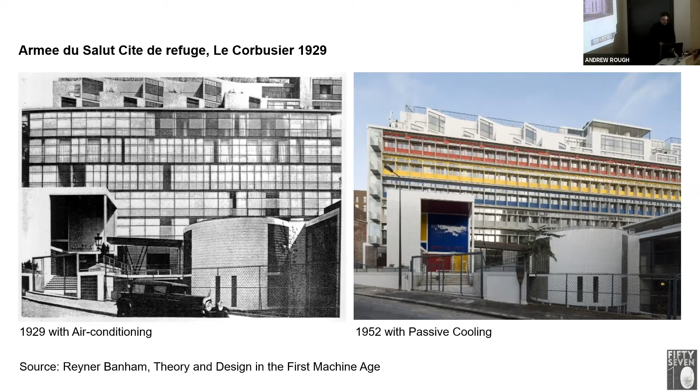So for me, this is the salutary lesson. Unfortunately, this is what we're doing again. This is what we need to do now, and that lesson was learned by Corbusier at the end of his career. We'd all forgotten about it until I read it in this book, and a lot of people obviously use this example quite a lot. But it's a lesson of our time. Have we learned anything? I would say no.

This is London, obviously the Shard. It is a lovely building, a really beautiful thing. I get crystalline towers and these sorts of things from early days. It is beautiful, but it doesn't really work, it doesn't solve the problem. It does it better, again, it's got a triple facade, it's all very complex, high performance glazing, and really fantastic, efficient air conditioning systems, but it's sealed, and you can only go so far.

The architects and engineers have done a lot of work looking at the embodied carbon of this, and it's better than you think, but it's nowhere near where we need to be.

So the net result of this, really over the last probably 50 years, is this: in 2018 we emitted 37 billion tons of CO2, and 40% of that is from what we do as architects, which is kind of quite shocking, really.

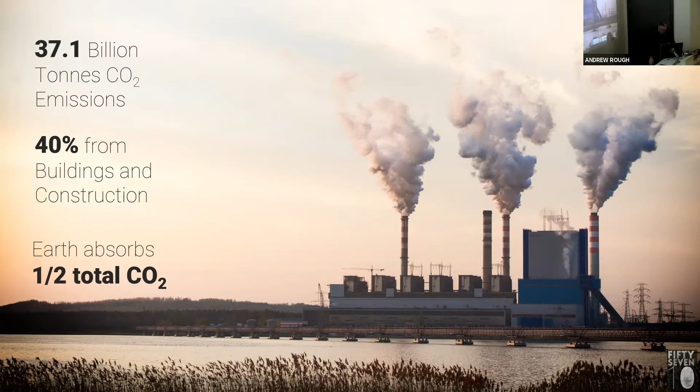And the Earth, at its best, can only absorb half that — though I even think that's debatable. And as we know, it's all been a COP. At the same time, we're cutting down our lungs. We've lost 1 trillion trees over the Industrial Revolution, hence the new push to replant 1 trillion trees just to balance where we were. This is a really sad example, the Amazon.

And the consequence of that, we all know, is that 1-in-100-year events, or even 1-in-1,000-year events, are happening every few years now. And this is all being predicted by the climate models as well, so everything we see now has been predicted. I was working on some of this modeling 10 years ago, it's been around for 20 years, and everything is actually coming true.

Floods, again, 1-in-1,000-year floods are not uncommon now. We've seen that happen this year in Beijing, Australia, Germany as well, and also in New York — that's three really, really statistically rare events happening around the world at the same time.

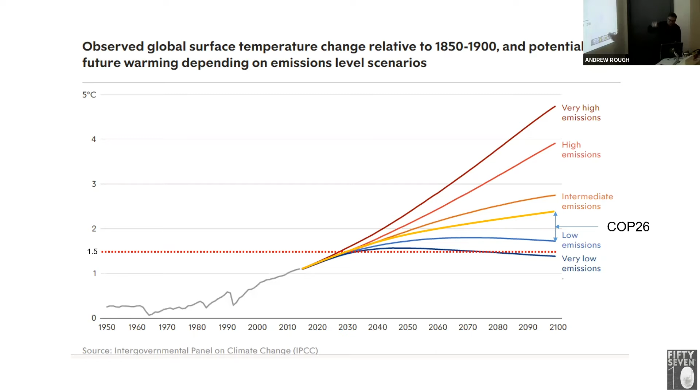Anyway, there's a lot of work to do. How do we get there? Right, so that's the first thing.

So I would say, just in terms of COP, hopefully you were all glued to your screens. I think it's the best that could have been done. I think the agenda was set slightly wrong, so it was always going to be difficult to achieve that outcome based on what was done.

And they missed this entire thing, which we'll come on to in a minute—the work that the construction industry, myself and others around the world, through the lockdown, we've all been having conference calls around the world and got ourselves sorted. So we've got to have a plan for how to get net zero by 2030 for buildings. That's what we're going to talk about later.

But anyway, on to the next thing. So what about me? And how have I come to this point in my career?

First thing is, I'm obviously from Aberdeen. You'll notice this is the Imrie stone circle. And this is where, coming back to this thing architecturally, it's just naturally—you take the context around you, and that helps form who you are. For me, this is it. This is about the local materials, it's from the earth, right? So this is where all my architecture kind of comes from.

The idea of actually dropping someone down and building a lovely spaceship type thing, Buckminster Fuller in the old days—that for me isn't the way my head is wired. So for me it's about this closeness to culture, closeness to the context, closeness to the earth.

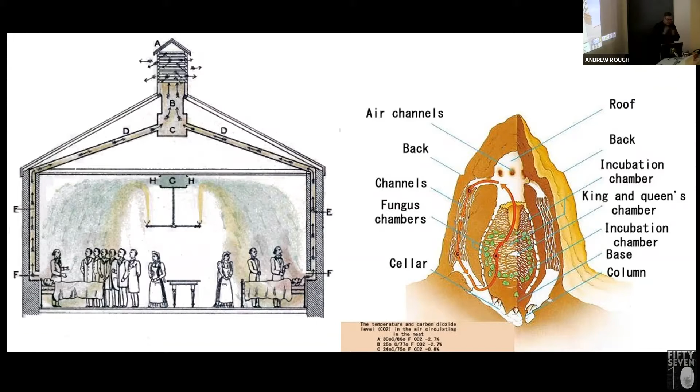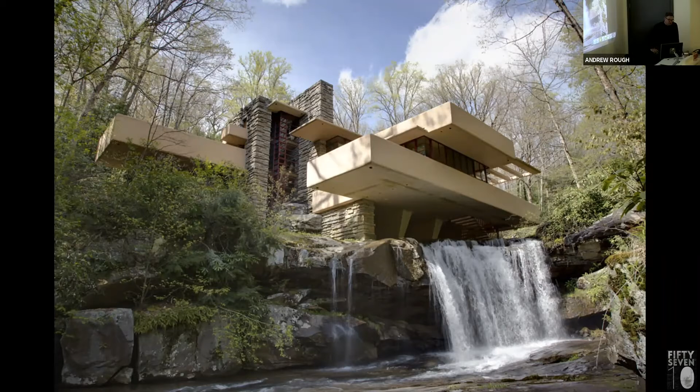And obviously there was no thing, obviously, with the architecture. This is my preference in terms of Falling Water, Frank Lloyd Wright. For me, it's got everything in it I aspire to. So again, that's kind of the education side of it.

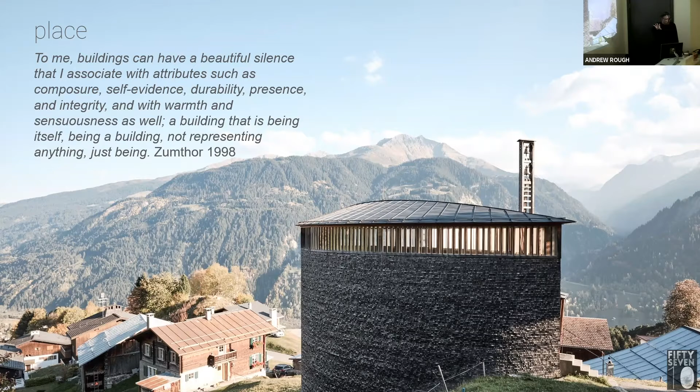So from that was the teaching side of things, really. That was where I was trying to teach here, 20 years ago.

And really from that, when I went off and did some research, and we've been talking about this, it isn't just about design. It's about numbers. And again, coming back to this thing where I do have this kind of side of my brain that is engineering as well as art. So the art and the science, the engineering, comes together.

And so I do love numbers, and I think we've all got to learn numbers. We can't rely, pass the buck over to engineers to then do the numbers for us. We've got to embrace numbers. That's the only way we can achieve this net zero.

You've got to understand, how much does your building weigh? How much does it use in terms of energy, all those things, but you've really got to understand that kind of numbers. So this is my education, my MPhil, and we went into the detail of buildings where you actually asked people. So I went in and surveyed all the people in this building and worked out what was working and what wasn't working.

And there was some real problems in the top floor. People just hated it. They absolutely hated the building to a point where they walked out. Oh my God, this is pretty bad. And this is a passive design building as well, by one of the profs in Cambridge. And then I did some salt modeling, so obviously you can do all this with computers now, CFD analysis. It's absolutely amazing. And at the top slide there is a kind of video as well.

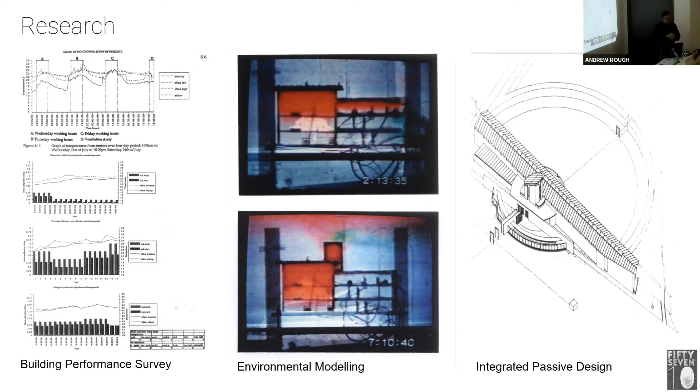This was the thesis project, which was a museum building. The brief was to design a museum building, but you're not allowed any mechanical ventilation or air conditioning—you've got to do it all passively. So everything was done based on humidity, because if you work with humidity, that's how you can preserve things. That was the kind of design there.

Then further research—this is when I was teaching here, so I was also doing some research. You'll notice Shell's headquarters building. Then I wrapped it up a bit, working with Oxford Brookes University, profs there, and we studied 1,000 people in Aberdeen and Cambridge.

I was running a field study in Aberdeen. We surveyed everybody and worked out this thing called adaptive comfort—that's the graph at the top. Everything you've read about comfort from engineers, talking about 21 to 24 degrees as a linear thing, is completely wrong. They've missed the point completely. If there are any engineers that still say that, please send it to me and I'll sort them out.

It actually changes—the comfort temperature inside is based on the outside temperature of yesterday, to complicate things. What we're regularly trying to do, and it takes a lot of argument, is get to 28 degrees centigrade. This is quite a challenge for us from the Northeast, but it's actually quite comfortable if the context is right, if you're prepared for it. It's called adaptive comfort, and we need to get to that.

I need to win that argument in every project with every engineer. If I don't win it, then what happens? I need mechanical ventilation, I need air conditioning, and then I get a sealed building for my engineers. So that's a really important win. When you're out practicing, challenge your engineers, talk about adaptive comfort, and then we'll naturally get to that natural ventilated approach.

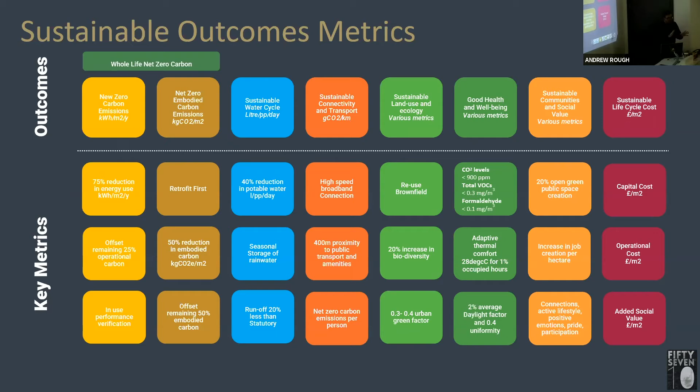I'm not going to go through each one, but really we start off with certain things, and it's reduction, and then it's actually reuse as well. Retrofit first is absolutely important. You can see it's all there, and I'll send this through to you. You should have this hopefully on your desk when you're actually looking at some of your analysis of your buildings and your projects, and then see how close you get.

So just taking each one very quickly - net zero outcomes. There's no shortage of energy. There's 1 kilowatt per square meter hitting us for half the day, every day. It's from the sun. It's how we actually harness it, how do we capture it, how do we store it - that's the issue, and how do we do that. The first thing is retrofit first.

We can't solve the problem by building new buildings, we can't do that. We've got to think about fabric first - regenerative engineering, recycling in terms of really efficient engineering, taking the machines out. When we do it, it's all about this passive house approach to thermal recovery, on-site renewables, and when you can't get enough there, we can't go crazy with eco-bling distorting the architecture of the building. I'm not suggesting that, but we need to maybe have some off-site as well. Then there's the embodied carbon things.

The temple here, if you don't know, a lot of these are rebuilt every 10 or 20 years, and it's just the same products - they're all kind of renewed in terms of replacing that, but they're all from the local area as well. A beautiful story - I sat next to a Japanese client and we talked about the types of timber, they grow it in certain ways. When the wind comes in, it changes the structural nature of the timber, and they use certain timbers from certain rotations in the buildings. It's absolutely beautiful, and really it comes down to retrofit first again.

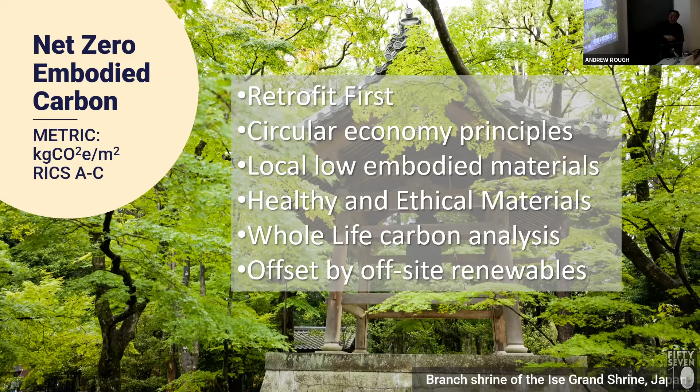We've got 45 million existing buildings in the UK, the worst performing in Europe. Think about that - we've got a lot of work to do, or you've got a lot of work to do, in the next 20, 30 years. Circular economy, as we talked about, low embodied materials, healthy and ethical materials as well.

Sustainable water cycle, going through that - obviously very simple stuff, low flow, leak detection. But you've got to think beyond this. You've got to think about taking the cycle and really expressing it, especially in your master planning projects. Don't hide the water away. Use that cycle, express it as open water cycles, as ponds, as rills, as drainage, little berms or whatever. And that's where we need to get to.

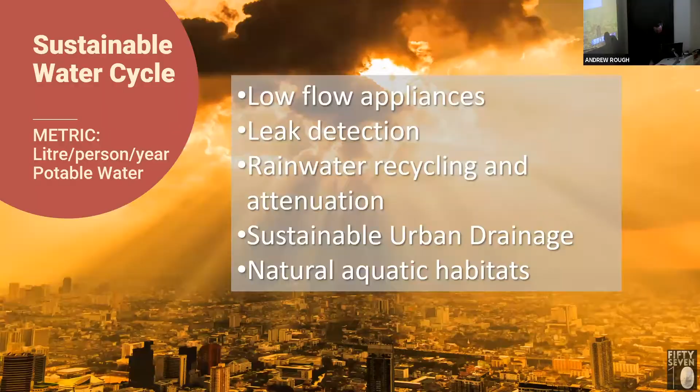The thing here is blended remote working. The pandemic has shown you that actually we don't need to all commute in all the time, right? So blended working is absolutely the main thing there. We've got to build next to public transport, and you've got to think about that high quality pedestrian realm as well. Too much, especially in Aberdeen, is actually the road engineers - they design our cities. We've got to stop that. Architects, we've got to design the cities.

So Terry Farrell, that's it - that's his whole ambition. He's done lots of projects in London - get away the engineers, you know, the architects. We've got to think about how the cities actually operate at a pedestrian level.

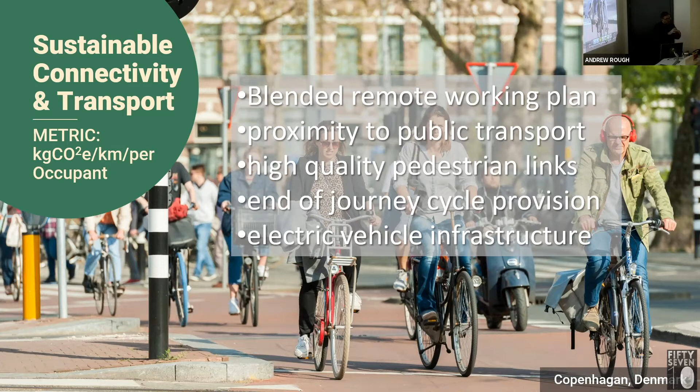Good health and well-being - really, again, this is it. We're creating lovely places where we can really hang out in the sun, sheltered. Contact with outside, biophilia, plants - absolutely a prerequisite. Good density, indoor air quality, which the pandemic again has shown you how critical that is and how unhealthy our buildings are. Good daylighting as well, adaptive thermal comfort, as we talked about, acoustics - all the things I've picked up there, all the things we've built up, it's all there, we all know it, but it isn't done regularly enough.

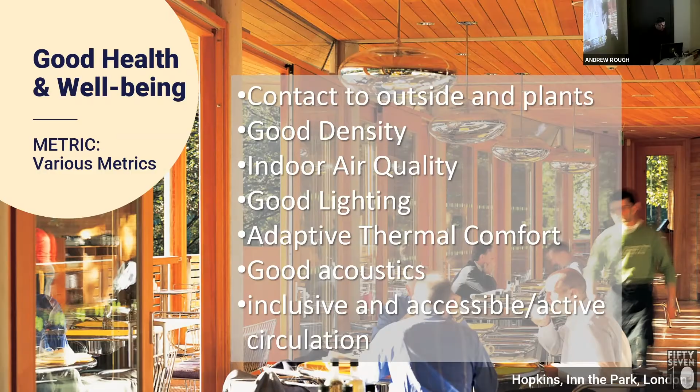And really, it's all about these principles of urban design, and we as architects should be embracing this as well. This is the fundamental of how we create good places.

And what we're trying to do is balance all the costs of what we do in terms of carbon and money, but we balance it with the added value of what we create in terms of health and well-being, and then the social value of what we're doing. So that is ultimately the basic equation of architecture.

So all of that is then embedded into the plan of work. This is the plan of work. Got your outcomes at the beginning. So you discuss that with your client, you discuss it with your teacher, you set your outcomes, you set your goals, you set your targets, and then you integrate that into your design.

So you can see there, the younger, the more junior years, you're generally doing concept design. And I think the final year, you're looking at your brief. So you're doing stage 1, stage 2, stage 3, and a bit of stage 4. So you can see that's most important.

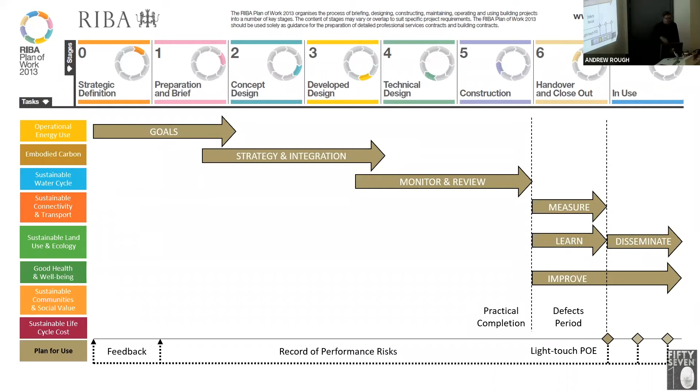Once that's done, I'm hoping that the RIBA will then mandate that the light touch POE comes in, so that means every building design has got to have analysis of how well it's worked. It's a game changer. I've obviously suggested that to the RIBA. I haven't really got a firm thing back yet, so again I'll work on that as well. But that's a game changer. If we understand how builds are working, then we can get better.

I'll leave that with you, but I've tried to distill, for all my colleagues and staff and other practices, in one page a little code of what you need to do when, and that's it. That's basically everything you need to think about in terms of the DNA of a sustainable building on that one sheet. Print that out, have that as a ready reckoner, and that is the complete cycle. If you follow those principles, then you're going to get pretty close to a sustainable outcome.

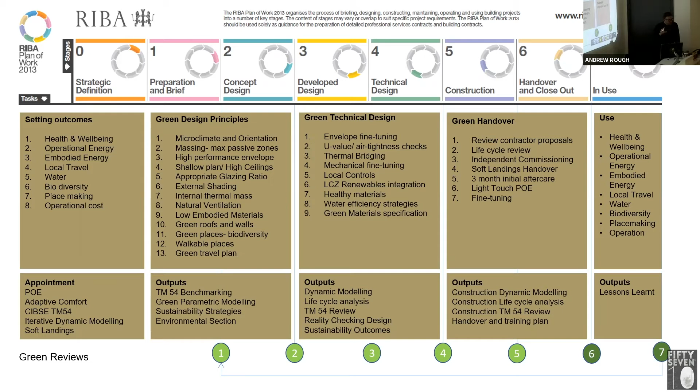Plan for use, not going to talk about that too much, but effectively that's going to be a game changer. Really light touch to the end of the year, because you can't go too much detailed that first year. You've got to wait and see how it's bedding in. It takes a year for people to get adjusted to places. So you need a full seasonal cycle, and it's only the second year that you start to tweak things. But it's important we get architects and clients to understand the life of the building, embedding people in.

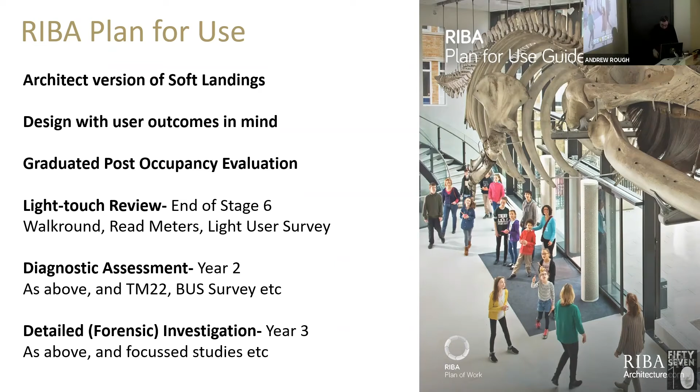And so we've set the goals, we've set the whole plan, we've given all the strategic things, and then the final piece is time. How fast do we need to go? And this is the diagram that we came up with.

We're at 2021. What this is highlighting is the general cycle of the average project in reality takes 3 to 4 years from your first phone call from a client or winning a competition through to completion. So we've only got 2 iterations to go as a practicing architect to get to net zero by 2030. When you come out, in final year, you're going to be out next year, for the earlier years like 2025, and then you only got 1 cycle.

So we've got to act now, and really it's basically every project on your books, everything you do now has got to be net zero ready now. So when you come out to practice, that's effectively what we're saying to everybody. There's no, you've got to start now, you can't wait till 2025, because how are you going to learn all the lessons of achieving net zero? So it's super, super important.

I won't go into too much detail on this, it's got a lot of data, but what we've done, again this is in the climate challenge, we've defined the numbers that you need to hit, and this is for the entire industry. A lot of balance, so it's got operational energy, embodied carbon, water use, and health metrics as well. The pie charts at the bottom are showing the balances.

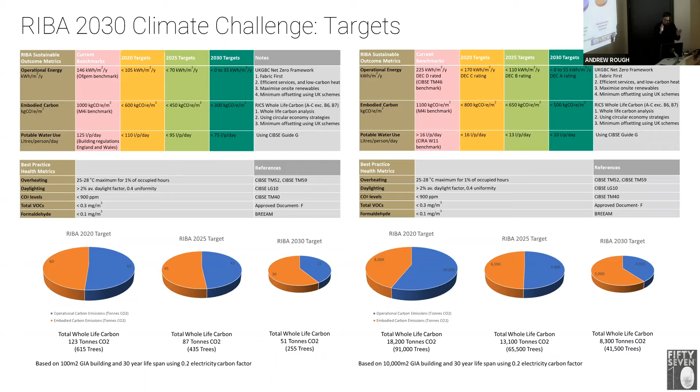Final bit of this section, really good fun, is I've managed to get into the sustainability awards criteria. I've written this with some colleagues, and everything I've just talked about is embedded into this form. It's caused lots of practices, lots of complaints to the RIBA, I kid you not. So we've simplified it a little bit for next year, but not much.

And then what we're moving to is, and this is where hopefully the RIBA, I'm going to keep pressure on them, is in 2030 a Stirling Prize winning project will have to be net zero. You can't get a Stirling Prize unless you hit net zero.

That's important. And that's why when I was judging in 2019, on the judging panel, there was an obvious winner: Goldsmith Street in Norwich, a Passive House development that really caused a lot of debate in the judging panel. Is it high architecture? No, it isn't. There was a lot of consternation about that, whether it's worthy of the architectural prize, the aesthetic prize. But we have to go beyond this, and this is why I'm saying the beauty has got to change. The definition of beauty has got to change here.

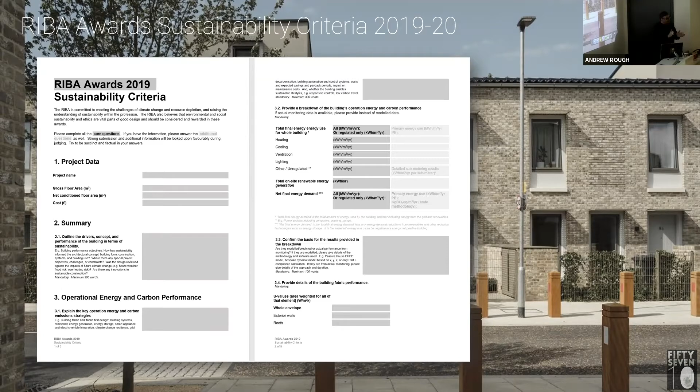This is a really lovely scheme. If you're in there, it's absolutely beautifully articulated, detailed, lovely street patterns, reinventing the terraced house. It's a bit embarrassing that you've got to reinvent the terraced house, but it actually hit the 2030 challenge. It's almost net zero, no renewables, it's Passive House, no PV on it. And on embodied carbon it hit our 2030 challenge as well. So it was a no-brainer, it was an absolute winner. That's the challenge, that's what we can do.

So, on to the little moments of how close I've come in my career. You can see I've tried really hard, but I've got to convince my engineers, I've got to convince the QS, the cost consultant, they're not on board. And if I can't convince them, I can't convince the client. It's only when you get a client, an engineer, a cost consultant, and a project manager all on the same page that you can achieve moments of closeness to net zero and sustainable architecture. If any one of those team members is against you, then it's very difficult.

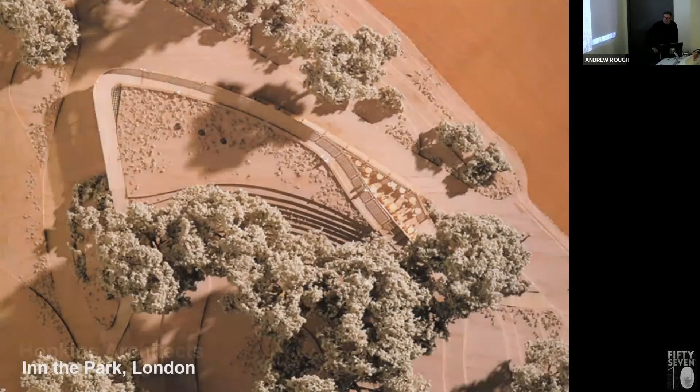So obviously I came out of teaching, and this is my first project in practice. It's in the parks, an ecological restaurant in St James's Park in London. The previous building was gone, looking concrete, there was no way to save it unfortunately. So we redesigned the building.

You can see here, it's an earth-sheltered building right in the centre of London. What we did is a bit of folding, we folded the landscape over the top of the restaurant, and then all the heights were set - very strict. I've never experienced the level of scrutiny of planning landscape. It's unbelievable, everything we designed was scrutinized.

So the height, we folded the landscape over, and the plan was derived by - at the back there's some plane trees, London plane trees, we couldn't knock those down and couldn't damage them. If we damaged them, oh my goodness. So we had to weave the building between that, and also the path was laid out by Nash back when it was originally designed - that was a listed curve. So the building design was basically using Nash's curve and the trees, and the building just wove between that. This ecology is basically working with nature, working with your context.

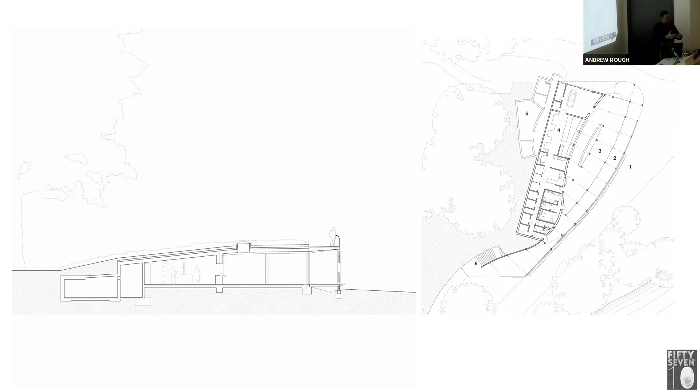Material, again I'm talking about the Japanese example - we wanted a timber that didn't need any coatings, so it could last for 120 years without any chemicals. There's only a few timbers in Europe that could do that, and larch was the one we chose. We looked at lots of different larches, Scottish larch and so forth, but we needed older trees at high altitude that have longer to grow and give a denser larch. A lot of larch in Scotland grows very fast, so it's great for cladding but doesn't have the density required structurally. So we had to go to Austria.

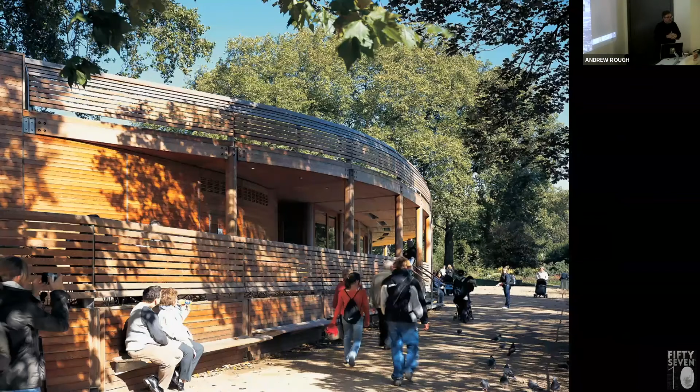And this is the finished building. If you've been in London, it's open, it's got a lovely cafe. Oliver Peyton of the Great British Menu runs it, so go there, have a great time.

You can see here we're trying to layer the outside, using all those principles of passive design. It's facing the view, facing the sun. The terrace then has the overhang, it's the shade, and it naturally engages with the public. We're making sure all the moments where people can touch the building, sit on it, use it - it becomes a big park bench basically.

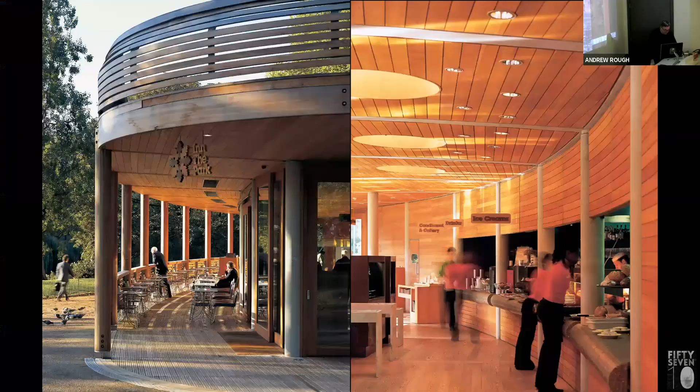It's been up for about 20 years now. We can see the terrace at the side there, this kind of layered effect - layering and passive design is very much a strategy there. Right at the back, roof lights create a lovely quality of daylight right to the heart of the building. A little detail there, we used stainless steel - these products are designed for 120 years life.

And this is the inside shot. Again, it's naturally ventilated, the actual restaurant area. Obviously, the food area is mechanically ventilated, but we use that to then take the air through, and that's the makeup air comes through the restaurant, and that's recycled as well and put into the back of house areas.

And that's the finished shot there. So obviously that was 20 years ago. I don't have a shot to the finished bit. It's looking - so we say it's not silvered. We'd love the idea it goes silver, but in cities, because of the pollution, it goes a little bit dark, but you can actually clean it up.

But anyway, that was my first project back in practice. Very proud of it. And as I said, I joined Hopkins, and I had a good choice of different practices, but I really chose Hopkins because philosophically, you can see they hit every button of what my architectural philosophy is about. I really share that philosophy.

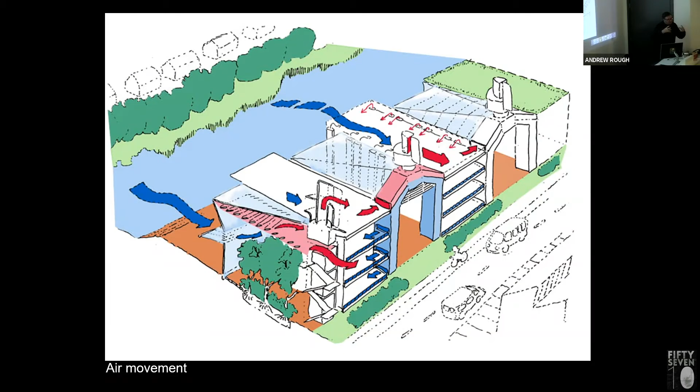Got wind catchers as well. So again, all that sort of idea about how you take the wind and help the mechanical ventilation was all there. And this was the sketch, and this was kind of the final design. You can see they're absolutely beautiful. It becomes the expression of the architecture as well.

We got the same budget, but we couldn't build the same architecture for the same budget because it was like five years on. So we had to lose the wind catchers and everything like that. It was a bit of a shame, but we managed to do a very low energy scheme on this one as well. So that's for the business school.

Then in Hopkins, one of my last projects there, flipping through - it was quite a few different projects. This is kind of one that's close to my heart as well. So we won a commission in Arizona, of all places, to design their new applied research building.

And it was an ecological and bio-based research building. So they took 30 of the departments, and it was all about ecology. And they wanted the greenest building in the world. That's the brief. The brief was that. Right, we went to greenest building, so that's great.

Right, okay. Obviously, I did do a calculation of my travel over on British Airways, and it basically was 0.1% of the energy it would save if we got close to net zero on this. And this is about 15 years ago. So this is where the thing about - again, we should all obviously fly less, and that's definitely it. But the big prize is this: all the effort we're doing, that's it. If we concentrate on getting this right, then we can save the planet. You can save the planet.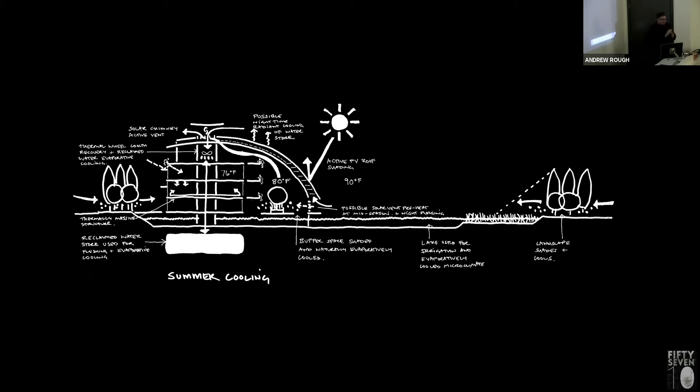So absolutely, in Wilkinson Eyre and obviously at HOK now, I insist that every team does one of these diagrams. And if it's not right, I can see right away.

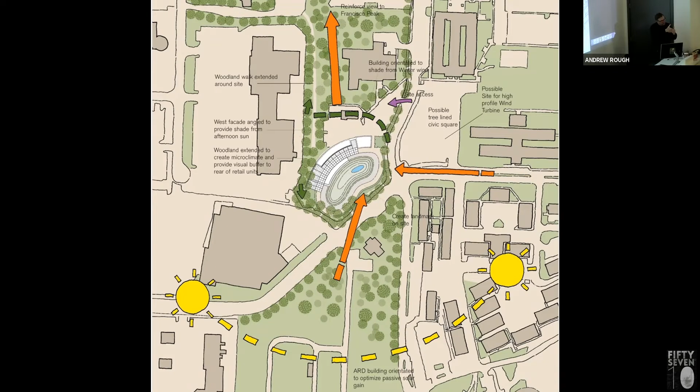This was designed creating a flood basin, keeping that there, but using that as very much part of the environmental design of the building, and then wrapping the building around the north side of the site to create an entrance, but also tuned because the early morning sun was actually better, beneficial for this area. You didn't really want the afternoon sun, so it's sheltered and facing towards that southeast location.

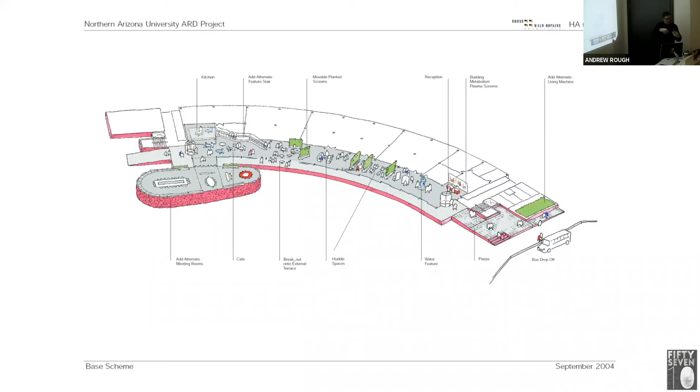This is kind of the street and the line level. It's all about this community coming together, very much like a street. But really all the research departments, instead of having corridors on the inside, they all face down, almost like shop fronts.

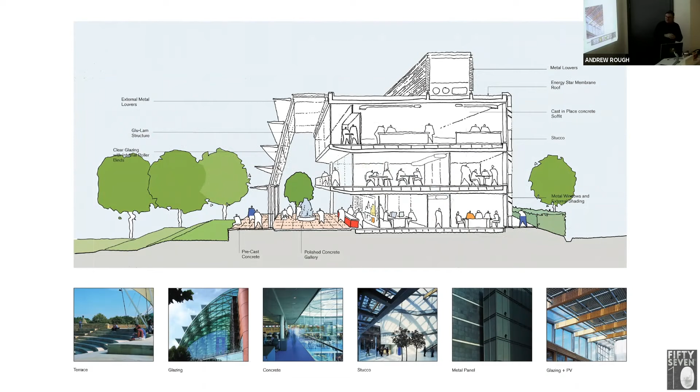And this is the section there, in terms of when we come close to finishing. And then what we did at Hopkins, we referenced our own buildings through the bottom to explain to clients how this vocabulary came about. So you look at the one at the end there, that's the steps in front of the Dynamic Earth in Edinburgh. Then we've got Evelina Hospital, and Norwich, and lots of different buildings there. And it's all integrated into that one section.

And this is my environmental sheet. I had great fun with this. Everything you think about, all the sustainable outcomes, that was all considered right in the heart of the design of the building. This is all done at concept stage.

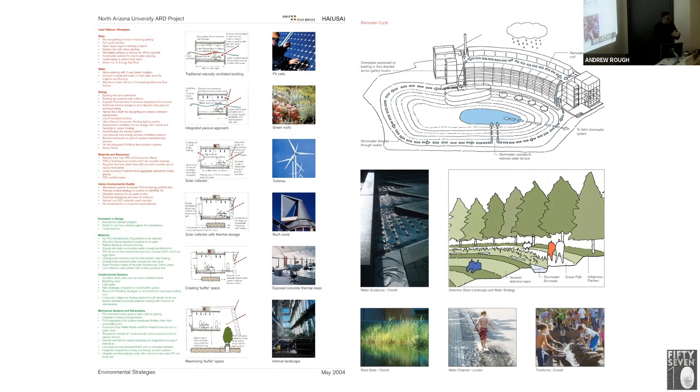Come back to the concrete. So the reason that we use concrete, and I'm still going to use concrete, is that if you don't have thermal mass, you can never achieve naturally ventilated buildings. You need the two. CLT - I think in Scotland it's kind of slightly different.

Our peak temperature, 30 degrees centigrade. I think we can get away with it from CLT here. But especially in England and London, you need that thermal mass. Okay, so that's the importance of why we express that.

I've always used 50% cement replacement, so that's only coming in now - 70% in the ground, 50% in the frame. And we're experimenting with a cement-free concrete just now. Hopefully my next building, which is one in Cambridge, that will be cement-free concrete.

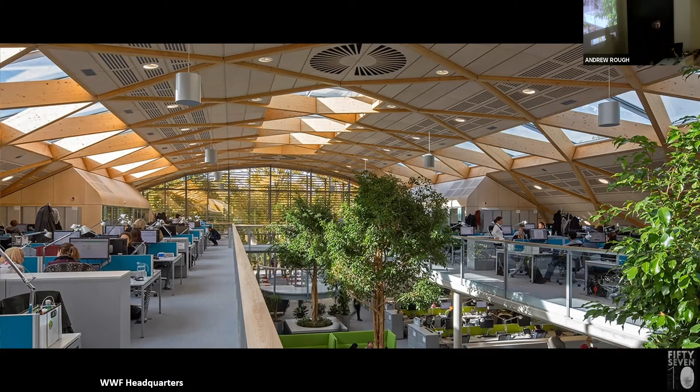Basic principles about daylight - we talked about this. It's really simple: the depth of a floor plate is 2 to 2.5 times the height of your floor to ceiling, and you've got to have high windows. That's the rule of thumb, and that's what this building was designed on.

The atrium in the centre creates a lovely quality of daylight, and everything else flows from that. These are the diagrams - I'll give you this so you can use it as reference in your own buildings. All the principles we talk about actually create fantastic spaces.

What makes this building is this quality of daylight, and there are breakout spaces where you can really enjoy the architecture and meet your fellow researchers, academics, or students. There are little moments next to staircases where you can have a little chat, a little breakout space.

And at the top you've got the views, and the professor said, 'I want a space where I can take Bill Gates and have a barbecue with him.' So that was the brief, and that's what they got - he actually got Bill Gates there and had a barbecue. A great selling point for the university as well.

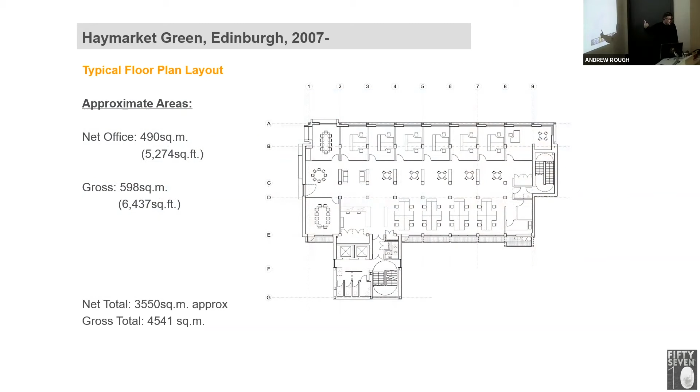This was 15 years ago. So that's basically what we did - we worked with Max Fordham architects and engineers, fantastic engineers, on a very simple plan. We plugged on a new core at the back, which became our stack ventilation system, driving the entire ventilation system of the building - no mechanical ventilation in this building.

This is the slide I did 15 years ago. Basically I could hit a 75% CO2 reduction, trying to get to net zero. Natural ventilation is possible - I looked at the kilograms of CO2 per person per day, because that shows the absolute efficiency of the building. We got an A-rated EPC, BREEAM excellent in those days, and it was actually cheaper than building a new building, so it was a no-brainer.

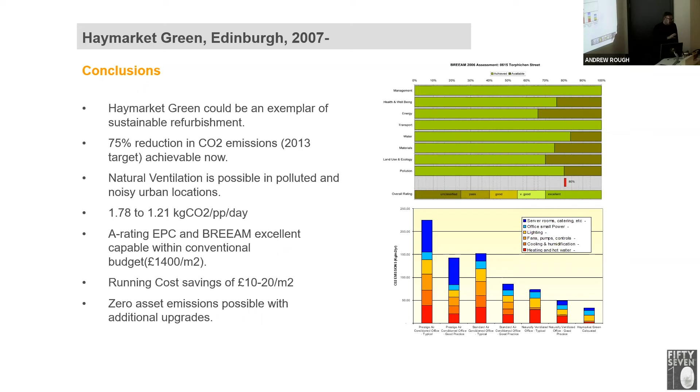Now that was 15 years ago, and we'll come back to it, but this is what we need to do - this is the bulk of the work that hopefully we will all do for the next 30 years. We'll be reconfiguring our built estate. How much new buildings do we actually need? That's the question.

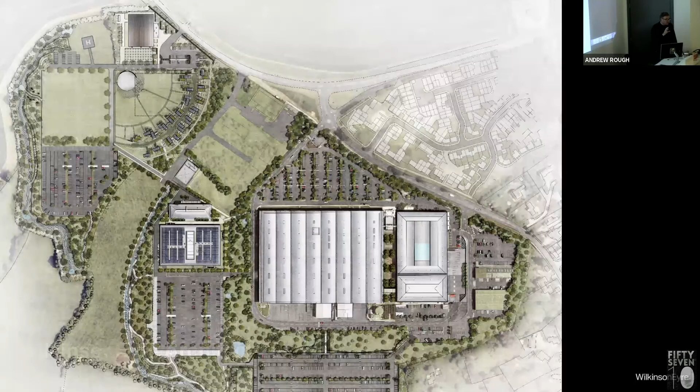I try not to move practices, honest. I come in and say, right, I'm going to be here, I want to retire here, but inevitability happens and you just got to go with the flow. I think there's very little job for life now, but if there is, grow in a firm, it's all good, but just embrace the change. I really enjoy working with different practices now, because you learn so much more. If I'd just been at Hopkins, I would have just learned to do the Hopkins way for 20 years. But my experience in other firms has been amazing.

So just a couple of schemes here. This is Dyson's headquarters building in Malmesbury, just outside Bath. We did a lab building for them. This is all the new technology of Dyson, all pre-IP, so it's so secret that I can't even get back into the building now. All the new inventions he's making are in this building. So labs in the middle, and then the offices around the outside. When I say offices, these are kind of little studios.

Interestingly, Dyson operates differently. Normally research is all about collaboration, and you want teams to work together to create new things. He sets the same task to two teams separately, and then uses internal competition. His desk is in the middle, on the top floor. The teams then come and present the product to him, and he'll crit it. I think he was quite gentle with us, but I think he's got a reputation. That's how he's obviously worth £10 billion now.

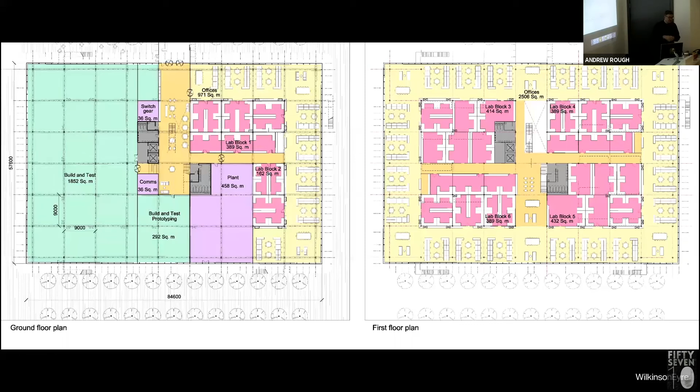Anyway, so that's the kind of plan. That was our early kind of visualizations. Now, the story of this is kind of quite fascinating.

I was working with Chris Wilkinson, who is a fantastic architect, total respect. But it's interesting, he's from a different age, he worked with Fosters, very much collaboration with Fosters. He's from this generation of Mies and this crystalline architecture. He's got the Crystal building in London, a fantastic building, but it's an essay in glass. He really is trying the poetry of glass, so he really wanted this as a glass cube.

So that set up a bit of tension. I did try to convince him to maybe not have all glass, and you can see I didn't win that argument. So then it became a challenge for me: how can I make this as sustainable as I can, because it's an all glass building? And I thought, oh my God, this is difficult.

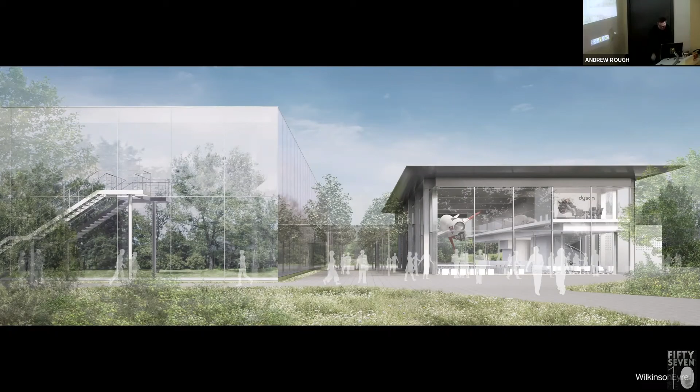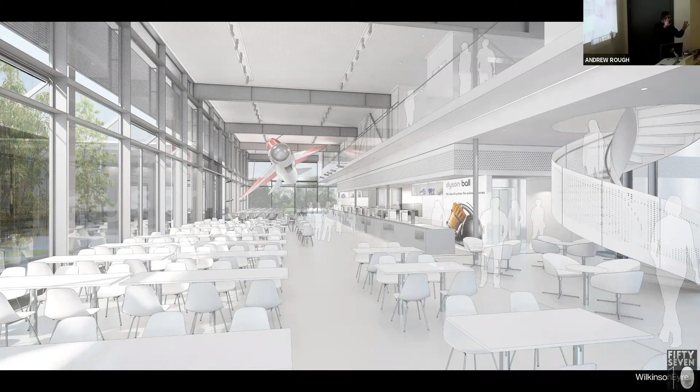This is part of the inspiration of Dyson: he has British products, British inventions — the most famous invention you can think of. He's got the original jet engine invented by Whittle, but he cuts things in half so it actually displays everything inside. All the engineers are inspired by things that are beautiful, but actually useful and creative.

So again, it only worked because we shielded it with trees right the way around the building. On the other side, the landscape was actually new trees, but once it's all finished, it's going to be enclosed in a microclimate of deciduous trees, reflecting that nature.

But the amount of engineering done to make this work, the performance of the glazing is beyond anything else, and that was the most difficult part. They had to get special glass from Germany for the G value. The G value, the reflective component of this glass, is actually 0.09. It probably doesn't mean much, but it's almost like looking at a mirror, yet it works anyway. So that's kind of the beauty there.

This is the view of the cafe, creating places for people to enjoy, with big overhangs for shading as well - we'll come on to that in a second. And this is the view of the building, so you can see it straight on in terms of its form.

Now, the reason it's reflective as well, I think, relates to the work he's doing here - he's had German, Japanese, and Korean companies sending spies to spy on his inventions. So that's partly why it's that way too.

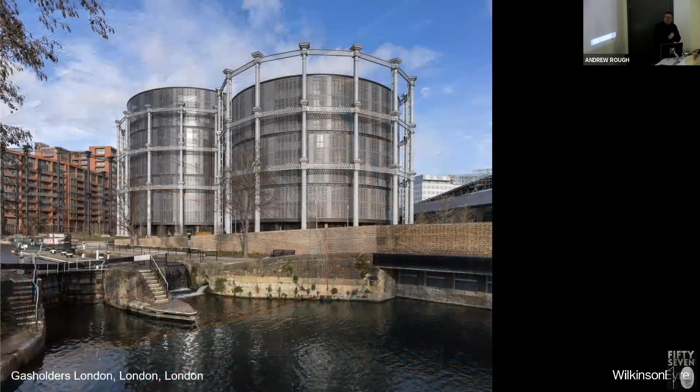Okay, on to the last couple of projects. This is gas holders in King's Cross. The idea here is there's a competition won by Chris, and it's a lovely story. Basically, it's 3 of the original gas holders, Victorian - this is coal gas. And then inserting into that was creating 3 new blocks of apartments with mixed use on the ground floor.

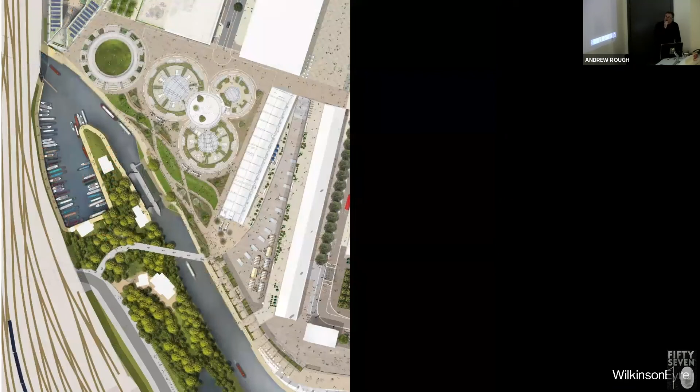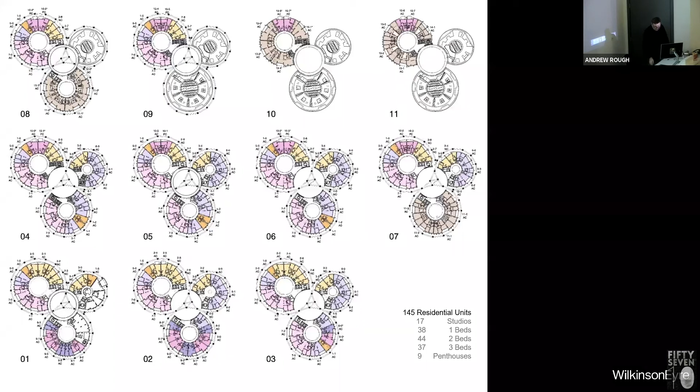How do you link it together? How do you make this work and make it beautiful? You can see there, that's right next to the canal, and these are all the types. I should have taken this one out, but it's the most complicated planning conundrum - it's like a piece of watch or clockwork. Everything's kind of twisted as well. A nightmare to build, but the top floor is absolutely amazing.

Views over London, and it actually looks pretty much similar to this visualization. This is the view of it finished, again next to the canal. Now, the thing I'm going to pick up on here is the facade - so the aluminium. There's a lot of aluminium here, which I was a bit unsure about, but I understood the logic. It's very much industrial, trying to take it right back to those early days of Victorian gas holders themselves.

But interestingly, these are perforated, highly recycled aluminium panels that are actually automatic shades as well. The whole system is designed to maximize shading at different times of the day, and it's all automatic. You can do a manual override, but for me, this is like a student competition - this is the one that you really want to win. It's all automated, and it always gets natural light, so the building is responsive and changes over the course of the day and the seasons.

The layering effect - this is what I was trying to really highlight to Chris - is that flat, single-skinned buildings really are not the answer. That is the wrong way. We've got to introduce depth to the elevation. This layering effect is really important: the external skin, the balcony set back, you've got natural shading, and then you've got the choice of natural ventilation as well. It all works together, and for me, it creates a better architecture as well.

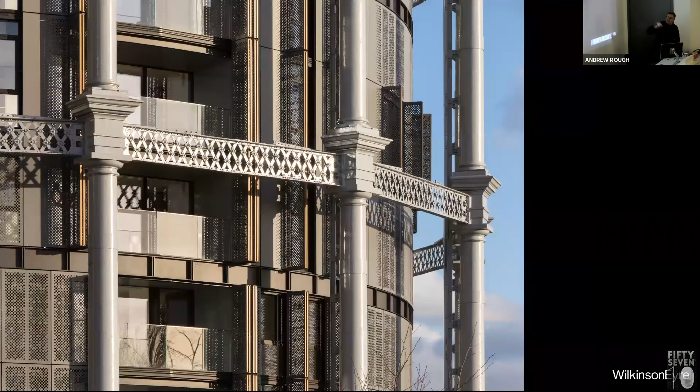That's going to zoom into that particular shot there, and then really just take you through the building. This is going to be the entrance lobby, and then into the atria. The atria is naturally ventilated with stack ventilation - it basically allows at certain points you can open your windows, and that stack effect will take the huge stack pressure there as well, which will ventilate all the flats.

And this is the kind of terrace here in terms of internal walkways, and this is one of the flats. It's quite reasonable - I mean, this is a 3-bedroom for 3 million, so if you're up for that. Beautiful, but obviously it's only a little bit really in terms of that.

The actual shape of the plan was interesting as well - it was a wedge, and that really helped in terms of getting quite a compact plan on the inside. So your dark spaces that need some artificial ventilation and so forth are small on the inside, but it opens up and creates this beautiful effect in terms of the architecture and the way the space flows.

This is kind of the seating next to the balcony, and then the shot, which really just sells it - that balcony, that space. In lockdown, I think this was a beautiful place to be locked down in. So Chris actually bought one of the flats as well - so you can maybe say hi to him if you're in there, okay?

Coming on to the last one. This is the one I just finished just before I left WilkinsonEyre. This is the law school for City University, just around the corner from the flat I used to live in. And this one was an interesting one.

You can see a glass tower here. Unfortunately, that concept had been there before I got there, and so I had the same debate: you need a glass tower, how do we make it work, and how do we achieve the net zero ambitions? The U value on that tower is 0.1, which if you know your U values is extremely good. But how do you do it on a glass tower?

That was my conundrum, given a problem to try and solve. We solved it, but the cost was ginormous, and we had to get a specialist from Germany to do the modelling because no one in the UK could actually make it work from a modelling point of view - that's how complicated it was. Doing glass towers like this is extremely difficult, and with the new regulations it's going to be impossible. For me, I think it's probably about time.

The reason we won this one is that we were the only firm that said we're going to keep some of the buildings. Every other firm knocked everything down, and that was one reason how we won it - an absolute masterstroke. So the two buildings in blue were kept. The other ones were beyond repair and were really in poor shape, as you can see in some examples there.

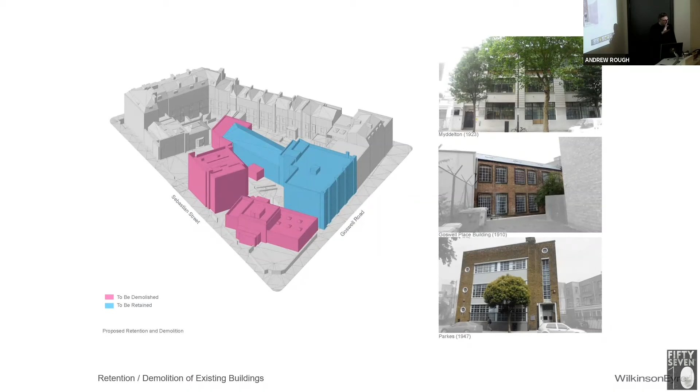So the sustainable retrofit mantra - hopefully take that into your practice when you come in. That's the first thing you've got to say: it's a retrofit-first scheme. That's it, you've got to do it.

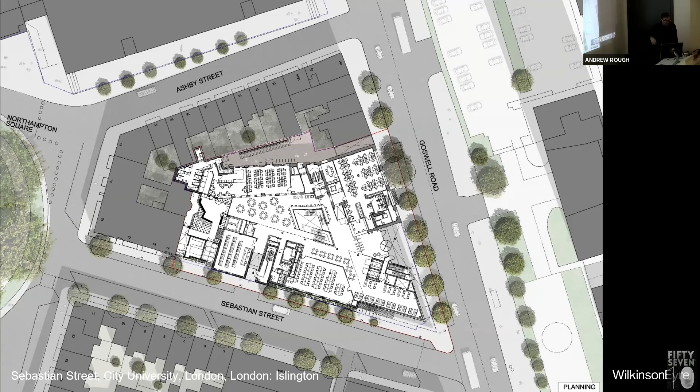This is the plan. Basically we completed the urban block, created a small atrium in the centre, and wrapped the space around it with a new entrance. A lot of the teaching spaces and library face Sebastian Street, with breakout spaces towards the lecturers and studios at the back, plus an old 1910 warehouse building.

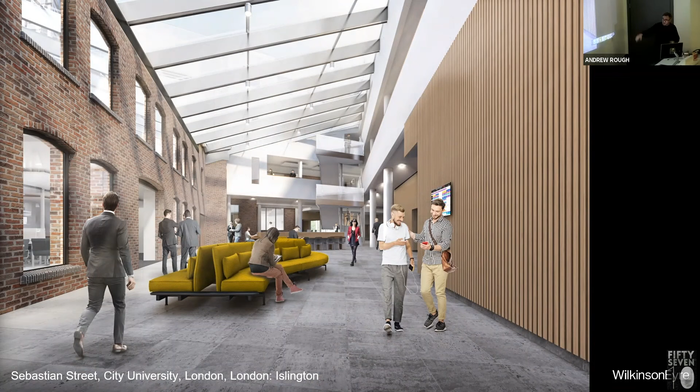This is a view back, trying to keep the material palette very simple - existing bricks and timber, a nice stone ceramic finish. And then the environmental section - again, our part one actually did all this analysis, so lovely diagrams he did.

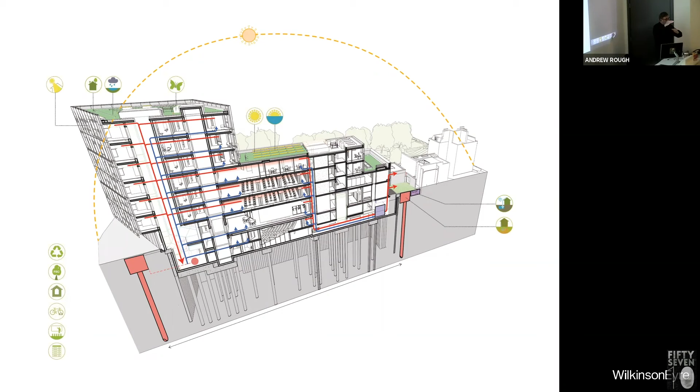The other one is the roofscape. I think Islington used this as their exemplar case study of doing an urban roof space - it's a blue and green roof. We've got a bee hotel, we've got bats, we've got everything on that roof right in the city centre. The blue-green roof is very interesting: it's a green roof with different sedums and grasses, and beneath that you allow it to flood to always have 100 millimetres of water, like a swimming pool, which helps feed the plants above. That's the view of it from the other side when it's finished.

So again, refurbished existing buildings, and it beds in really well. To be honest, I think the tower at the end, as an expression, the university loves it because it's their gateway building to their campus. So again, that's why it all fits in well.

Picking up those things, the final scheme I did for WilkinsonEyre was this one. We won the competition with the same approach - we were the only team that was going to keep the existing building on the site. This client wanted the greenest college, or the net zero college, in the UK. So this was our scheme: basically layering behind it all with an existing concrete frame, which we then just clip things into, very similar to the scheme I did back in Bennett.

We won the competition, but unfortunately a pandemic happened, there was a change in how we teach, and there were some problems with the site as well. So that's all been paused, unfortunately. It's a bit of a shame, but hopefully they'll find another site.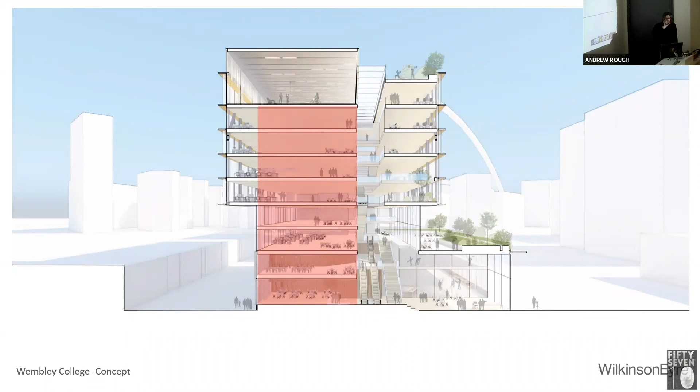That central bit is the existing concrete core. The engineers we had, O'Callaghan, who do all the Apple stores and all the glass, are past masters. So we looked to analyze the existing frame, then you actually bond on carbon fiber tape, and you can strengthen the existing concrete with carbon fiber. That was the strategy.

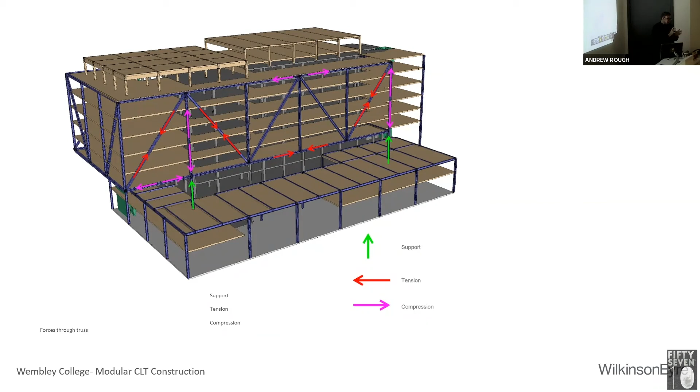Absolutely phenomenal stuff. We clip on new bits of building, and we introduce a new staircase in the atrium right in the centre, which becomes, believe it or not, our basic means of ventilation for the entire building. We did a lightweight steel and CLT timber option, but as we discussed, the analysis showed we had to go to precast to get the thermal mass needed for the natural ventilation to work.

That was the diagram at the end, showing all the things I'm talking about integrated together - this clip-on retrofit, natural ventilation, good daylight, passive design. We used a passive house approach. What we found is that the analysis showed there's only 30 rooms that might need some mechanical ventilation.

We said, right, you get domestic heat recovery systems the size of a suitcase, and we're just going to buy 30 of them to give to the building maintenance person, who can plug them in when needed. So it's your air conditioning system, but you only use it and plug it in when you need to.

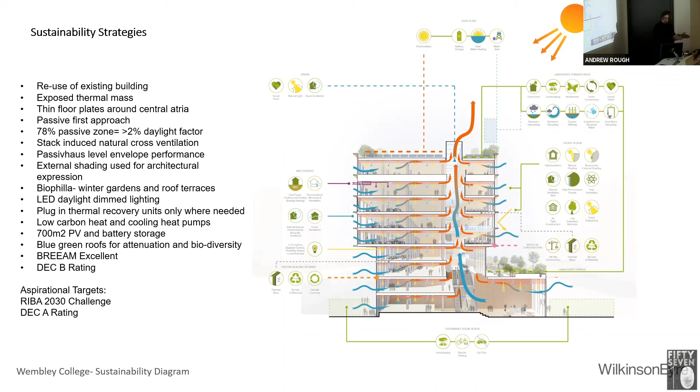All that is analysed - every building I do, I keep all the data. So coming back to this thing about numbers, every building I've touched and looked at, I plot it on this big spreadsheet I've got, and I see where I get to. Basically, that 75% is really important - that's where we need to get to on site. That's our RIBA 2030 challenge - do we get to that 75%? Then we're allowed to offset 25%.

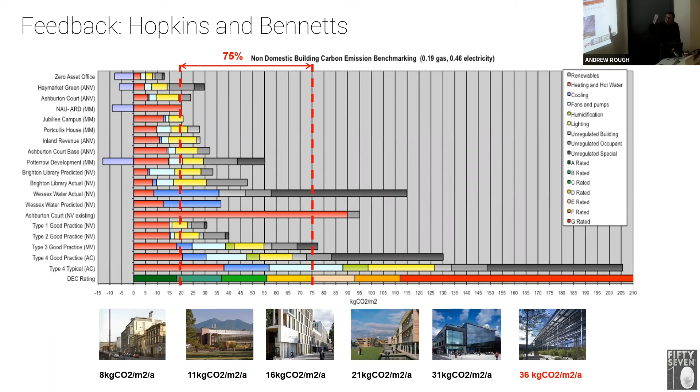That's absolutely critical, and you can see some of the later buildings come close to that 75% reduction. But generally what happens is you can achieve it for the basic heating, light and ventilation of the building, but the problem is the amount of energy we use for charging phones and computers - that's really the key issue now.

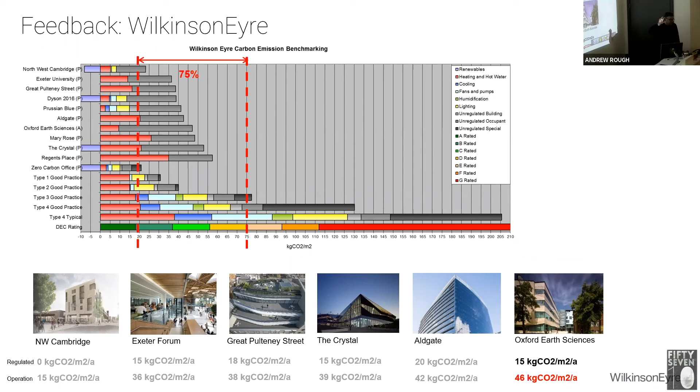That's the same analysis applied to WilkinsonEyre buildings. Northwest Cambridge actually plugged into a massive CHP engine, which was then powered by biogas. And King's Cross - sorry, Argent, the developer - has now converted to biogas, so that's now carbon neutral. The entire scheme is now carbon neutral.

Then through lockdown, we picked up one of the biggest COVID testing laboratories in the world. We did all that in Teams, and it's finishing, handed over - I think we've handed over all the lab lines. It's capable of doing 300,000 PCR tests a day. That will be the main lab which continues after we closed down all the other labs. That was fun, done in an old warehouse - all modular, low embodied carbon, everything like that.

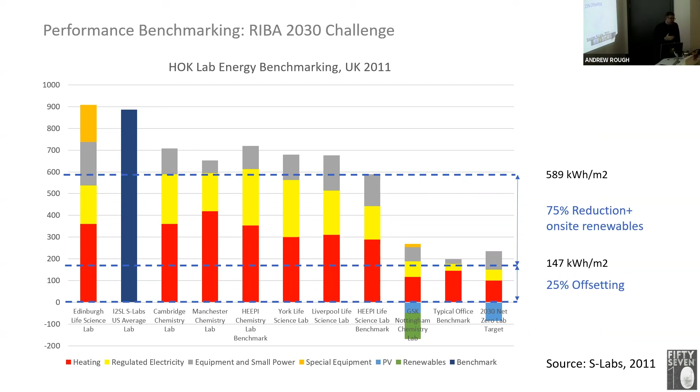So this is analysing how we get to net zero and all the tools we use. We've analysed those two buildings, trying to get to 147 kilowatt hours per square meter for a lab building. It's higher because the lab building requires the highest amount of energy for what they've got to do, quite rightly. So can we achieve 147? And we can. This is just the tip of the iceberg.

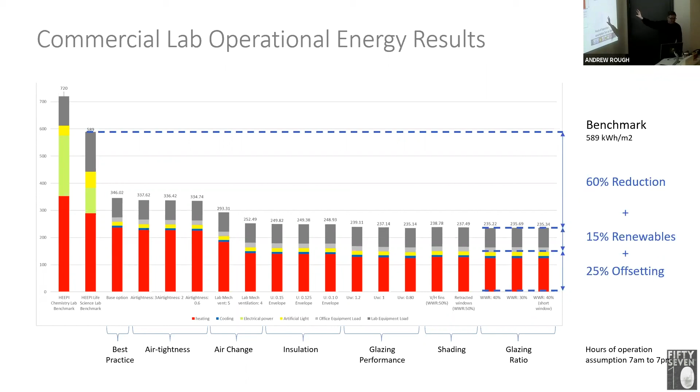Through these different methods, we can get to 60% reductions, plus 15% renewables, that's 75%. So that is your target, 75% reduction. If you can get that, you're on the right track to net zero. Then we offset - that's operational. This one I just got the results back a moment ago.

So we did the same with embodied carbon. Embodied carbon is 1,400 kilograms of CO2 for every meter squared. For 2 of your seats, a normal building will take nearly 1,500 kilograms, 1.5 tons, to make that one square meter of space. Enormous, okay?

So how do we get to net zero? We did a base case looking at in-situ concrete, higher recycled content, and various other techniques, but it's a standard building. We can get to 800 kilograms CO2 per meter squared.

The medium version, ironically, was the one where we thought we'd get better results. That was precast concrete with precast columns and a bit more steel - lighter weight than the in-situ, but actually higher in CO2 than the in-situ concrete. A very interesting result for us.

But that's not the end of the story - we've got results back just using timber. There's a thing called biogenic sequestration. When you use timber, and keep the building there for 120 years, you can count that you're taking that carbon out of the atmosphere.

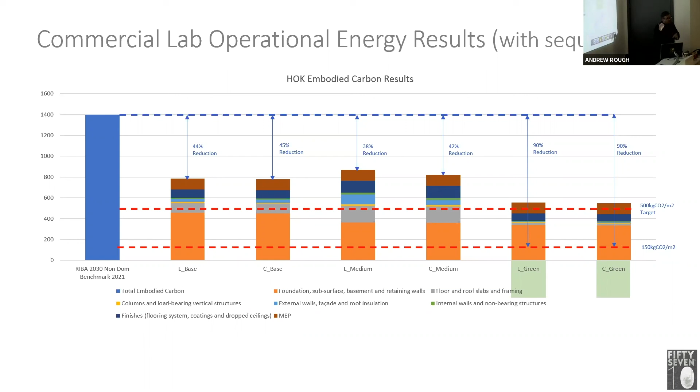This is interesting because hopefully we're going to get shortlisted for a building in Warwick. The client wants a net positive carbon building. What that means is, from this analysis, the most carbon is in foundations. So if we lighten the entire building, and think about how we touch the earth lightly, I think we can get to net zero completely. So that's the next thing - really excited about that.

Anyway, finally, I hope you're doing really well. There's not many people nodding off, so that's absolutely fantastic. I don't know about you at home - I hope you've had a cup of tea or whatever kept you awake. This is the final section.

So that's me. You can see I've had these moments where I come close, but I'm not satisfied. I'm going to challenge myself and challenge the teams - we're going to hit net zero for every project moving forward. And as a pledge to all our clients, we will give our clients a net zero carbon ready concept for every project we do.

We've got to try and convince them to then pay for it. That's the next challenge. So anyway, that's me.

Now, this is actually what is important, because this is showing examples. I use this as part of the RIBA deck that I've given around internationally, giving talks in New Zealand, Australia, America, you name it. It's all very interesting. But these are moments where we've actually achieved net zero now.

This is a net zero house in Nottingham. It's a retrofitted house using EnerPHit and a passive house type technique. And they can do it. The only problem is it costs £70,000 to retrofit that home, so that's a bit of a problem. But if we do more of it, we can get faster and get better at it. But that's net zero — we can do it.

This is Justin Bere Architects — maybe invite Justin up to give a talk as well. He's a phenomenal passive house architect, one of the first to really take it through. This is a house for a client where he's gone net positive — the house is generating enough electricity to deal with all its stuff. It's got a heat pump and thermal recovery, but it's got surplus to power an electric car. That's what we need to get to.

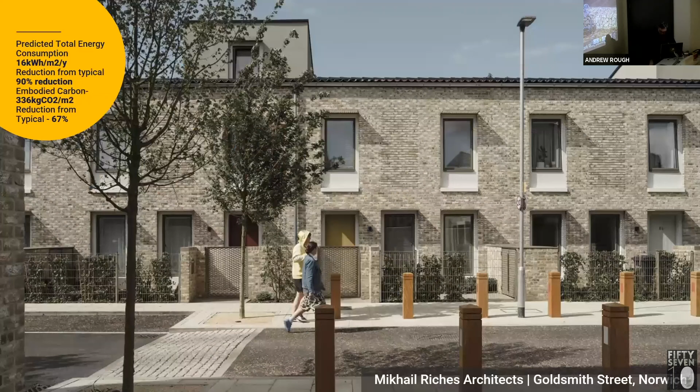And not only on a small house, but we need to scale it up and make it mainstream. And back to our Goldsmith Street in Norwich.

This achieved the 2030 challenge at scale, 150 homes at £180 a square foot, which is actually marginally more than a normal house in Norwich. But nothing compared to the £300 a square foot you pay for building social housing in London. So it is possible. That changed the lives, lifted families out of fuel poverty as well, which is absolutely amazing. That's why it won the Stirling Prize.

Scaling up, this is a project with Allies and Morrison. We're doing a joint venture with them on carbon, so-called Cambridge East. The owners of Cambridge Airport are going to redevelop it and shut it down, and we're going to create the largest net zero scheme in the UK, if not Europe. That's on the board just now — we're just doing some of the calculations.

Allies and Morrison did a lovely student accommodation in Cambridge, but they never analysed how much it was performing. I said, give me some numbers and I'll work it out for you. Ironically, it's fantastic — 63 kilowatt hours per square meter, which nearly hit our 2030 challenge. They didn't even know about it, but they know now, and I think they're going to analyse all their work now. A really beautiful, very simple thing. So ecological design doesn't have to shout — it can be very simple, very integrated, very contextual.

This is exciting, this one. This isn't obviously us — this is again Archetype, a joint venture with Hawkins Brown. This is going to be the largest passive house scheme in London, if not Europe — 550 units, again hitting passive house in terms of operational carbon. Really interesting to see how this is going to be embedded in.

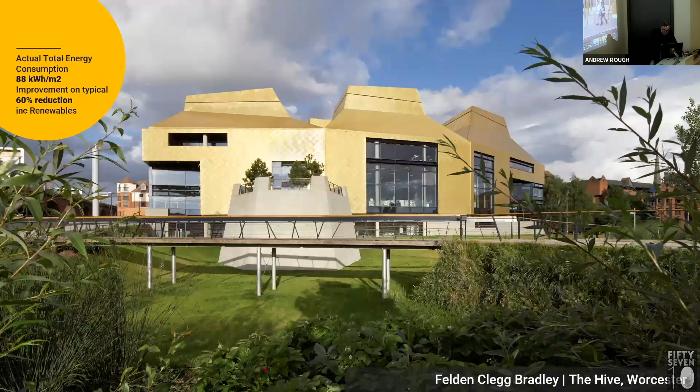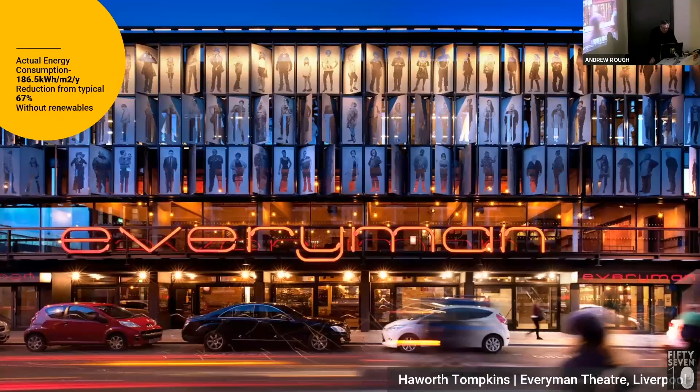And then the last one to show you is this one - Everyman Theatre. Again, about 10, 15 years old, I think, this one. This one won the Stirling Prize. And Haworth Tompkins, who - Steve - was very much part of the Architects Declare group. Epiphany, everything he does now is retrofit. Yeah, he won't even touch new buildings now, which is quite fascinating.

Anyway, this one reuses the brick of an existing building as part of the core of the theatre inside. So it tried that - obviously a very lightweight facade, but actually it was all naturally ventilated. So again, it was using all the principles I talked about right from Victorian times, and actually reused it there. You can see it's obviously a large number, 186 kilowatt hours, but remember, theatres and concert halls are enormous generators, they use a lot of energy. So it's really roughly about a 70% reduction.

And this is coming back to this thing - this should be from now on: the RIBA Awards, the Stirling Prize, has got to be beautiful and it's got to perform. If it doesn't do either of those, it shouldn't win.

So just to take away, last slide, I promise - this is 10 things that you need to do at your desk tomorrow. For the practitioners, 10 things you need to do tomorrow at the desk. First one is you've got to agree and define what you mean by sustainability. Think about your outcomes, think about the goals you're trying to set yourself. It's all there, it's all written down - have a look at the guides.

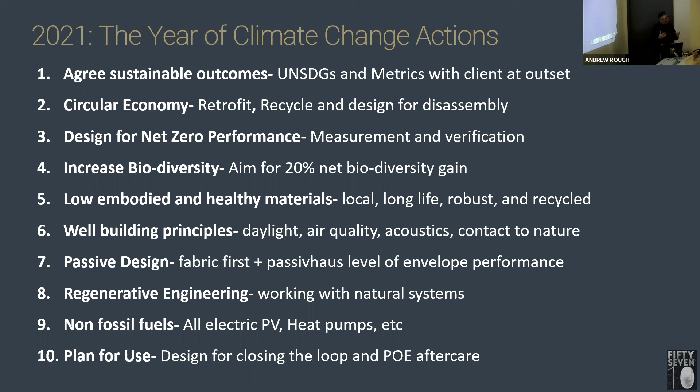And then finally, plan for use. Think about how your building's going to be used and operated throughout its life. And that was the last slide, but this is the goal. Thanks very much.